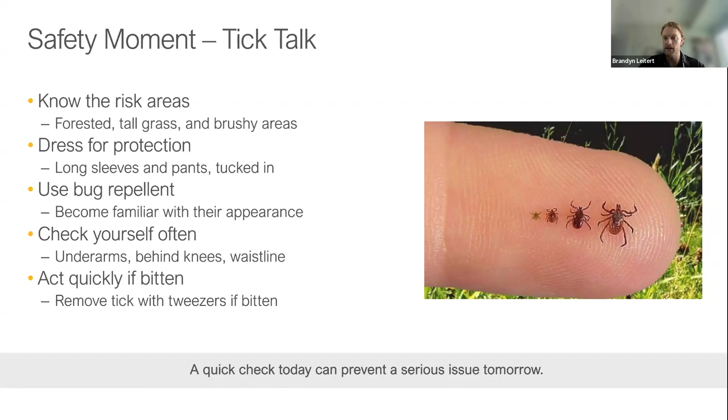For me, the first time I noticed a tick on me was last year, and that led me down the rabbit hole of learning all the different types and the different tick-borne illnesses they carry. The Lone Star tick with the red meat allergy definitely scared me a little bit, but I learned a lot through that, and now I'm able to identify them. So check yourself often, especially after you've been outside, and act quickly if you've been bitten. If you have been bitten, removing it with tweezers or pinching it with your fingernails is important. But usually if you catch it within 12 hours, the risk is quite low—it's once the tick has been on you longer that the risk increases. So just a reminder to everyone to take a few seconds to do a quick check after you've been outside.

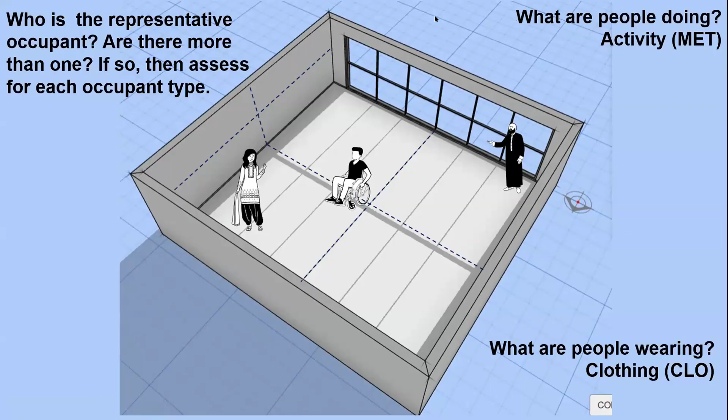So that's great, we'll get you to put it into slideshow mode if you wouldn't mind. Yeah, you bet, let's see. See if I can do this. All right, good to go? There you have it, thank you. All right, so the next slide here, really what we're going to do is, I'm just going to minimize this screen here so I can look at some content. Kimberly, do you know how I can get, maybe there we go. Is that, whoops, just hang on a second. What I'm trying to do is get the screen on the right to disappear, I don't even know if that's possible, is it? We don't see a screen on the right, we just see the blue slide with the home, and then we see your picture up top. So well, I'll tell you what, we'll try to, I'm not sure why that is, but let's just take it and see where we go.

Anyways, one of the very first things we need to talk about today. So as Gord gave us a quick summary, today what we're going to do is talk about how you see spaces and people through the lens of the thermal comfort assessor. And what we want to make sure is that first and foremost, we recognize that there are different people occupying spaces. Not everybody is the same. And as a result of that, we don't want to make assumptions that everybody is the same. So who are we actually designing for? And that is really important, particularly when you get into multiple families living at home or multi-story, multi-family buildings.

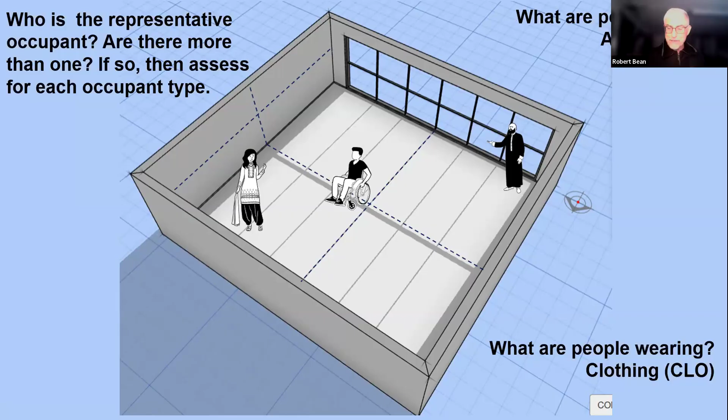So let's start asking questions first. Who are we designing for? And as we learned in part one, we're not designing for the space, and we're not designing for the room. We're not designing for the mechanical systems. We're in fact designing for people. And so we need to start asking some really good questions like, well, okay, so who are we designing for? And what are they going to be doing? And what are they going to be wearing? And tragically, we heard we should have been designing for the person with the gun, the person who was so upset about the thermostat setting. We should have understood, ooh, they've got a gun, we better design for them.

Yes, it was funny. So for those who were in the first presentation, yeah, we brought up that. But then Gord, afterwards, I was thinking, we were talking about perspective, and we showed slides about thermal comfort standards for cattle and poultry and rodents and pigs. And I thought, well, what happens if cows had guns? Yeah, what would that barnyard look like?

So anyways, and then when we start to talk about the metrics, and we kind of introduced them in the first part, when we talk about air temperature, it's really important to understand that what we're talking about is not what the thermostat is reading, but in fact, what is the air temperature around the person. And we make this statement that where the person goes, so goes their sense of comfort. They carry it with them, and it's not represented by anything other than their own bodies and their own minds.

And then we talked about mean radiant, and we're going to talk about that quite a bit in the next hour and fifteen minutes or so. This term represents all of the surface temperatures around us. And why it's incredibly important is that roughly 60% of the sensible heat transfer that people have with their environment is via radiation. It's not convection, it's not conduction, it's not evaporation, it's in fact radiation.

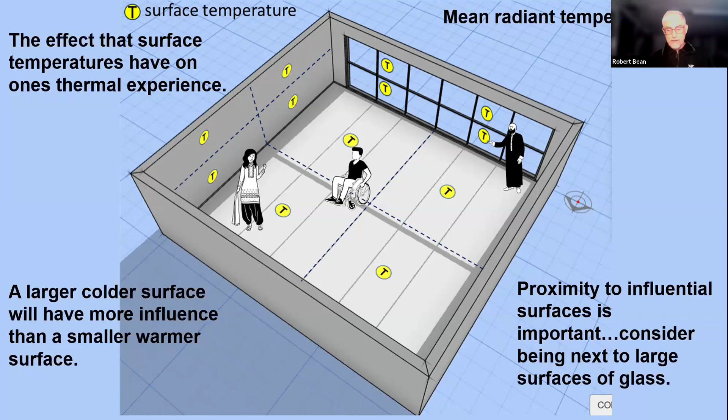Like when you think about standing next to a large pane of glass at minus 40 degrees, it's not pleasant. But if you go into the interior of the space, your perspective changes, what you sense and what you perceive changes as well. So let's keep that in mind.

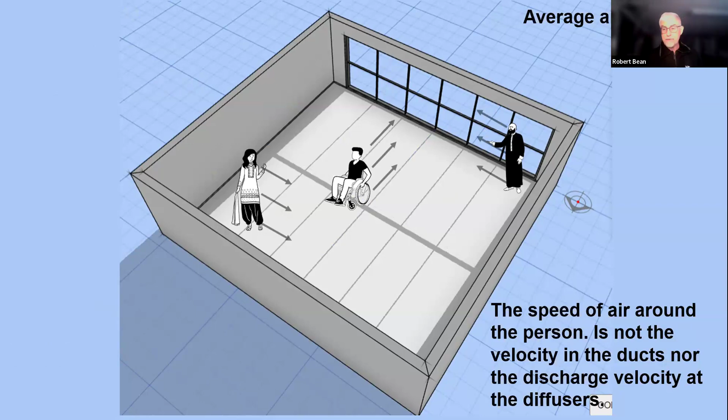And then the next thing we want to talk about is air velocity. What is the air velocity around the person? Again, this isn't what the velocity is coming out of the duct. So when you're doing your load calculations, if you're doing air-based systems and you're looking at the diffusers you're using or registers, and there's these terms throw, drop, and spread - we're not talking about any of that. We're actually talking about what is the air velocity around the person. And that'll come really important here in the next few slides.

We also want to talk about relative humidity. They say it's relative, right? Because it's related to the dry bulb temperature. Well, what do we know about dry bulb temperatures in buildings? We know it's not homogeneous. We start to approach the exterior of the building, and particularly here in extreme climates, that temperature is going to drop, and that's going to change the relative humidity.

So RH is important, but as you're going to learn here throughout the next while, is that humidity, although we recognize it as having a role, in particular in hot, humid climates, there are ways that we can compensate for elevated humidity. In fact, in the standards, we actually don't have limits. There are limits for building science purposes, there's limits for indoor air quality purposes, but when it comes to thermal comfort, we can actually drive humidities up and down, even though it might have consequences elsewhere.

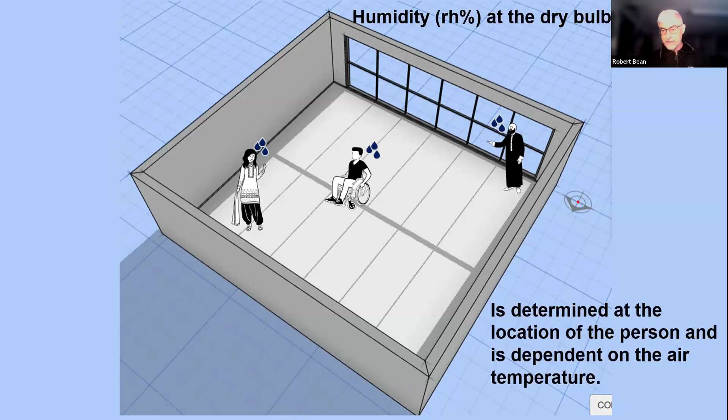Then we also look at what happens to people when they're in a low MET activity and wearing low clothing. There's other factors that come into play. We want to know what are the temperature profiles on either side of the person - we call that radiant asymmetry. We want to know what the temperature stratification is - that is the difference of temperature between the dry bulb temperature, between their ankles and their head.

We want to know what the drafts could be in that space. Ankle drafts in particular are really annoying, especially in cold climates where you've got this change in density as the air hits that glass, changes the profile characteristics of it, starts to come down the glass, and now you've got this draft. So we want to know about these things because they will also play an influence on people's perception. And then also elevated air speeds.

Elevated air speeds actually work really well in hot, humid climates. We don't want to be doing this during the wintertime, but there's lots of times where we can actually use mechanically induced elevated air speeds as a way to provide the sensation of cooling. Not that we're actually cooling the space, because we're not actually changing the air temperature, but we are elevating the airspeed, which improves the cooling off of the occupant.

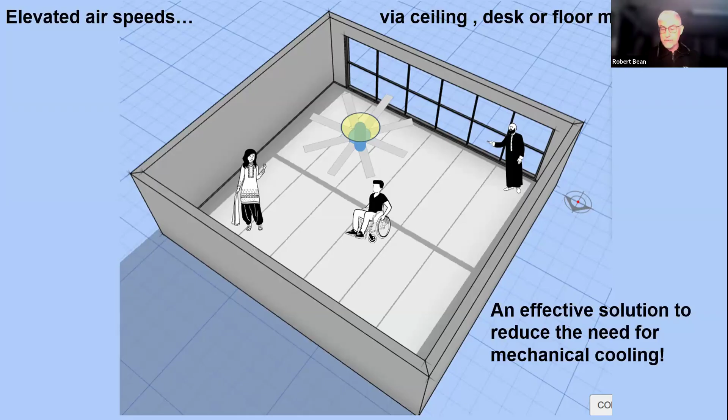And so there was a big push within our community at ASHRAE, SSPC 55, our committee that deals with this stuff, to rather than use more mechanical refrigeration, to look at using elevated air speeds as an alternative way of providing the sensation, the perception of cooling. So one of the conclusions we have here going into the next part of this presentation is that thermostats do not sense what people sense.

They sense themselves, but they're not located where people are in the space, and they don't recognize all of the metrics. Even if you say they do recognize air temperature, yes, that's true at the place where they're located. They don't represent the air temperature where the person is located. So we really want to be careful of that.

When we talk about thermal comfort, we oftentimes hear people say it's a gender issue, males versus females, and we've seen that all over the world. Part of that has to do with research that was flawed. The big publication houses, the Wall Street Journal, the New York Times, they all pick up this stuff and distribute it without digging into the source. When you dig into the source, you find that for the most part, genders have very similar physiological systems in terms of the sensing and perception of thermal comfort.

There are some differences, but it's more of an academic interest. What really drives discomfort between the genders has a lot to do with clothing and restrictions on the ability to adapt. But at the very core of it all sits architecture, enclosure, interior systems.

When these passive systems have flaws in them, and we try to compensate with mechanical systems, this is where one of the big problems occurs. Often we're trying to solve a problem we don't quite understand, using HVAC systems that may not be matched to the problem. So when we have a radiant problem, we solve it with a radiant solution; when we have a convective problem, we solve it with a convective solution. Don't mix those two up, which we have done for many generations, and that has led to a lot of problems inside spaces.

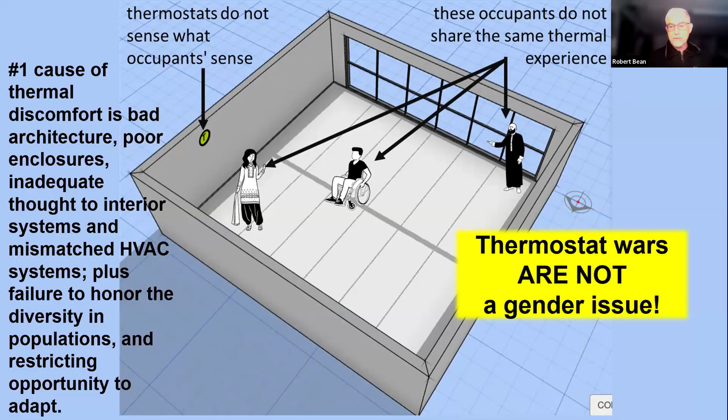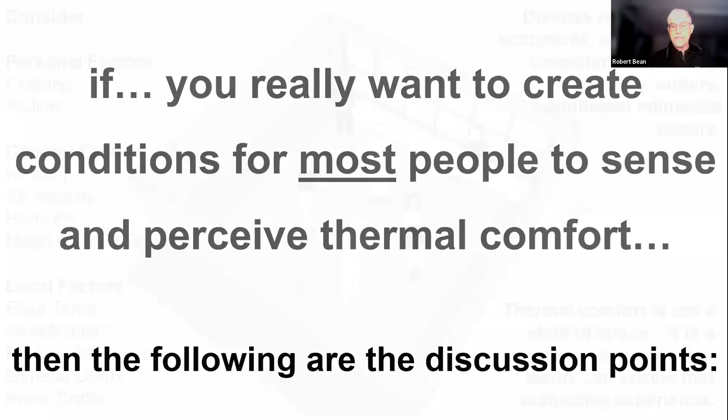So that's really important in this next part of this presentation. If we really want to create these conditions—and Gord, thank you for bringing up the importance of the wording we use—then we can create conditions. Let's talk about the conditions that are the discussions we need to have with our clients.

On the left-hand side are the basic ingredients of the thermal comfort cake. I'd suggest that if you're using air temperature as a proxy for thermal comfort, that's like calling baking soda a cake—you're missing everything else in the process. So we use all of the ingredients to evaluate it, and we need to sit down with our clients through those lenses and ask, okay, who are we designing for?

What are the special needs that might exist? We need to understand that thermal comfort is not an actual condition of the space, but in fact what's actually going on in the mind. We showed slides earlier about positron emission tomography—you can actually see the brain lighting up as you change the environment around it. So let's make sure we understand that. Everybody's brain is not the same, so it's subjective, as Gord pointed out—everybody is different. Not everybody's going to sense the space in the same way.

So we're sitting down with the client, looking at maybe the draft form of a set of drawings, and we want to talk about how seasonal changes affect the indoor spaces, how the sun moves across the building, how the building is oriented on the property, and what the architecture, form, and geometry are. All of these things are important because they start to affect mean radiant temperature, radiant asymmetry, and stratification. All of these things come into play.

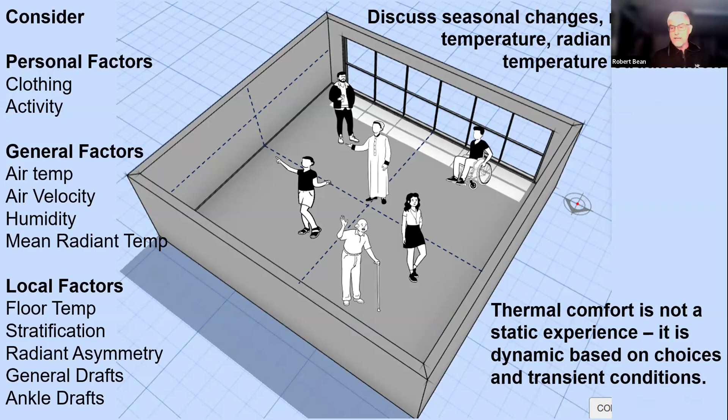So then, as we're dealing with these design elements, looking at glass, we're going to talk quite a bit about the importance of the fenestration systems, the window-to-wall ratios, the performance of the glass, and the orientation of the building with glass relative to the sun.

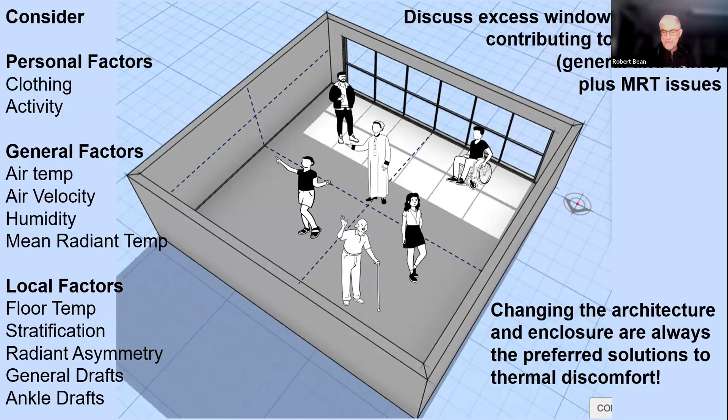All of these things come into play because ultimately they will affect the amount of energy that comes into the building and how that energy moves through the space. One of the things, and this always happens, Gordon, maybe you've experienced this in your own presentations, is that a lot of people, when they do load calculations, they don't account for the inside surface temperature of glass at heating or cooling conditions and the extremes that they can get.

Even high performance glass can have these extreme temperatures. So if you think about a really large window to wall ratio, it might be 100% or 80% window to wall ratio. What we want you to start to look at is surface temperatures that could easily hit 100 degrees Fahrenheit or 55 degrees Fahrenheit. So here you are, your perception of thermal comfort is to maintain a 20-degree air temperature, but in fact you could have surfaces around you that are way off base, and those will drive the expectation.

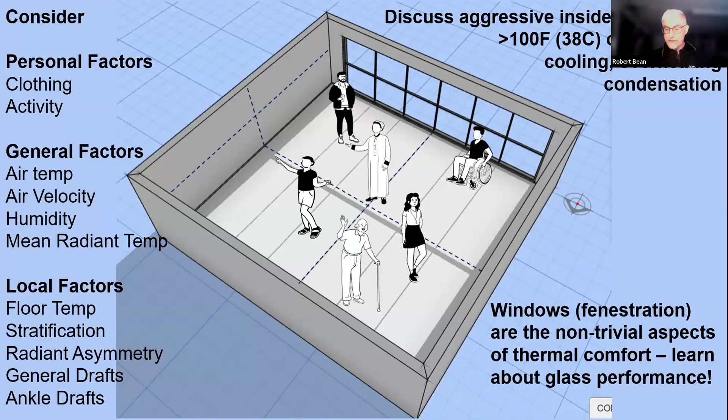So that's why we say air temperature isn't a proxy for thermal comfort. It requires all of these other metrics. So windows, fenestration performance is really, really important.

When we talk about window to wall ratios and what the client wants to do, and what the architect wants to do in serving that client, if we can't get them to back down or be a little bit more conservative with their choice in glass, then we start talking about solar control. And I don't mean on the inside of the building, because that's the worst place for it — do it on the outside. Develop shading strategies that prevent that shortwave radiation from landing on the building in the first place, or coming through the glass in the second place.

And I just came back from Brisbane. We were there for a couple of months, and I can't think of any other city in the world I've been to where they have mastered the art of exterior shading in all building forms, all building shapes. They really understand that sun provides wonderful things for humanity, but ultimately, as it's starting to prove out with climate change, it is becoming a real problem for us inside spaces.

So that's really important. And then when you start to talk about the glass — learn about it, Gord. I think you probably agree with this: if there's one thing people could understand in the world of architecture, building science, mechanical design, it's to learn about glass, learn about windows, learn about the coatings you can put on, learn about when you need to go from a double pane to a triple pane. All of these things are incredibly important. And I would say, if I was the master of the universe in education programs, that would be one of the key courses I'd have people take.

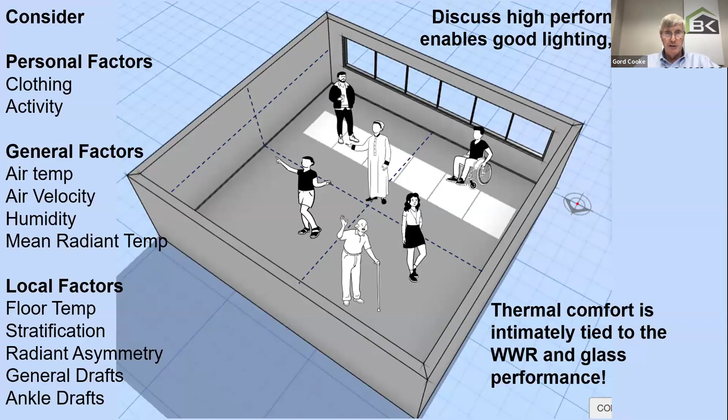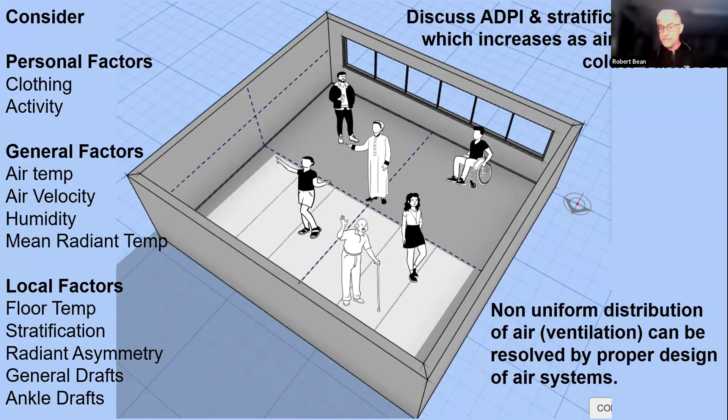And then we want to talk about this concept — not many people on the residential side know about Air Distribution Performance Index, or ADPI, but we can use these principles to make sure we have really good mixed temperatures within the space if we're using air-based systems. We also want to draw attention to the fact that as we go from the inside to the outside, our relative humidity will change as it approaches colder surfaces. So we want to try to avoid non-uniform areas, and we can do that by using good design practice. And Gord, I think you've been teaching that for a long, long time.

So that's important. We want to talk about, particularly in hot, humid climates, because we do have some people from hot, humid climates — and by the way, shout out again to those who are from around the world.

Again, we have people from India and Egypt and other parts. Thank you for that. And Ajax, India, Egypt, and Ajax. Thank you, yeah, that's awesome. I'm kidding a little bit. That was nice of Pradeep to say where he's from.

When we're talking about these hot, humid climates, the ability for the body to release energy via the latent process requires that we create a differential between the vapor pressure in the room compared to what's on your skin. If the vapor pressure in the room is the same as your skin, you're not going anywhere with that. So why we dehumidify a space is to create that differential, so that if you get into a place where it's overheated and humidity is playing a role, we actually enable the body to do that discharge by lowering the vapor pressure in the room, which is what dehumidification does. But we're going to talk about that later, about when that becomes important and when it isn't.

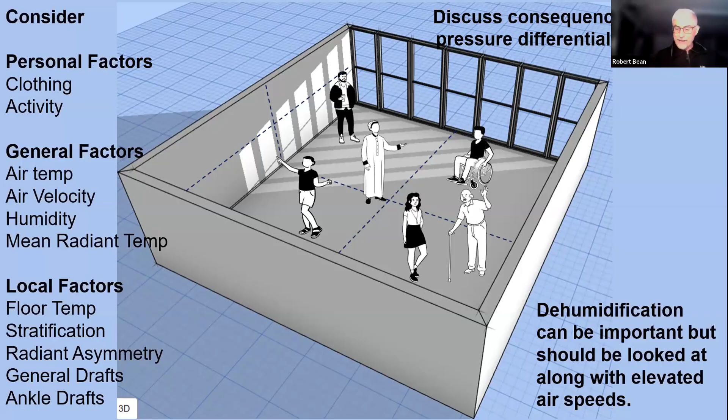We've already mentioned using elevated air speeds in lieu of mechanical cooling. So when you're sitting down with your clients, if they're not willing to budge on window-to-wall ratios, or they're not wanting to put on exterior insulation to solve these thermal problems, rather than going to mechanical cooling as your default, ask them: would you consider using ceiling fans, for example? Some people are okay with ceiling fans, others find it unattractive. So have that dialogue so you're not making assumptions about what they like and don't like.

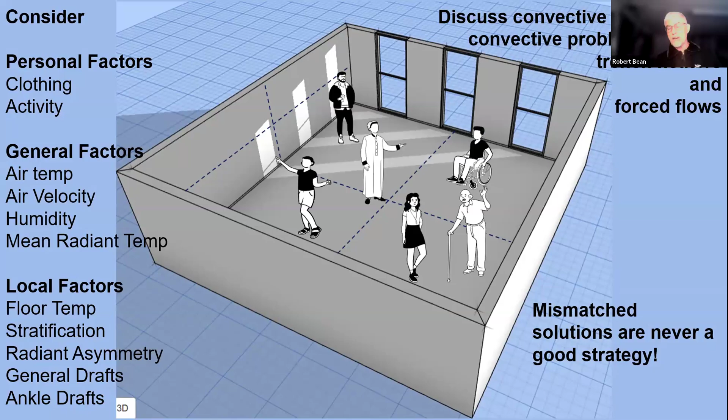And then understanding in terms of temperatures: radiant solutions for radiant problems, convective solutions for convective problems. Just make sure we're not trying to solve a problem with the wrong solution, which we have. Unfortunately we're all guilty of doing that, but just keep that in the back of your mind, okay?

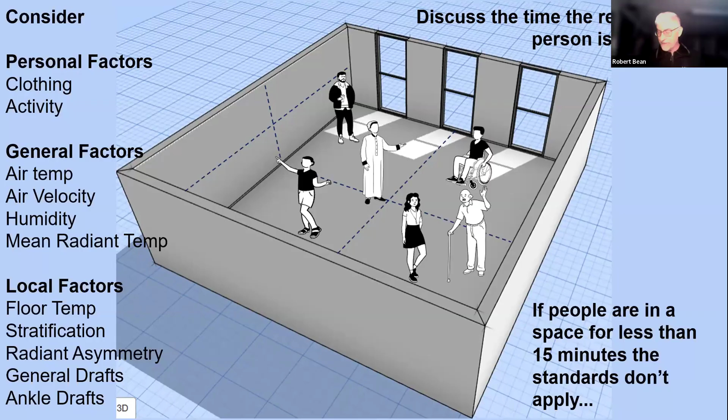One of the things that's really important when we talk about thermal comfort is that there are going to be spaces in homes or buildings where people just don't spend any time, and we don't really need to concern ourselves with that. The standard says if someone's in the space for more than 15 minutes, then we need to pay attention to it. But if they're not in the space for more than 15 minutes, not an issue. So we don't worry about boiler rooms, storage rooms, closets. These aren't the things we're concerned about. We're concerned about where people are actually going to be living and doing the things they do during the day or night.

So then we also want to talk about adaptive comfort, natural ventilation, these types of things. I'm all for using adaptive methods whenever we can, but we can't do it without understanding that there are risks. When you think about the drive to use natural ventilation, we're going to open up the inside to the outside. As soon as we do that, we're inviting the outside in. Well, let's define the outside — it can have bad air quality, there could be noise, there could be security issues, there could be protests, all these things that can happen on the outside. As soon as we open up to naturally ventilate our spaces or adapt for comfort, we're inviting the outside in. And that's great if it's got great air outside, there's no noise, no security issues, moisture's not a problem.

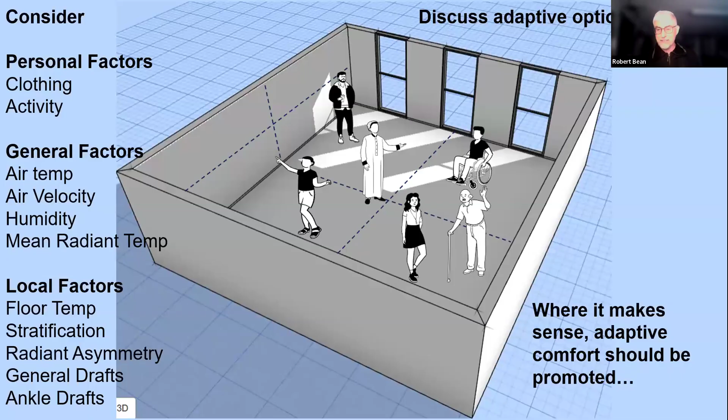What I would challenge you today — and we've been working with other organizations around the world — is that when you push adaptive processes, natural ventilation, natural heating and cooling, recognize that every building is on a continuum, as is the community around it. So you might think that building today is a good candidate for adaptive measures, natural ventilation, but also try to understand that over the next 50 or 100 years, anything could come around that building. It could be a meat packing plant, a set of train tracks, a bus route put in next to you. So just keep that in mind when you're thinking about using adaptive methods and measures in your analysis.

So the hierarchy of design always starts with architecture — the shape of the building, the form, how it's situated on the property itself. The property is important.

What's next to the building, the colors that are on the building all come into play. What we call the thermal optical properties, its absorptivity, its emissivity, all of these things are important.

Then we look at the enclosure. Now we're talking about the performance of the glass. We're talking about infiltration, thermal bridging, all of these terms that we use to describe the performance of the enclosure, that comes into play.

And then we talk about interior systems. When I talk about interior systems, I want to make sure that we're not confusing interior design with interior decoration. I made that mistake once while riding from the airport with the senior president of the American Society of Interior Designers. I said, well, what do decorators do? She just about kicked me out of the taxi.

So interior designers are people who very much understand colors, absorptivity, emissivity, fire escape plans, all of these things that are important. So interior systems, we talk about placement of furniture, things that might disrupt flow patterns, might affect the thermal comfort of people. They're a big part of it.

And then, and only then, do we talk about mechanical systems. So those first three, architecture, enclosure, interior systems, those are all passive solutions. And when they're done right, then it's easy. The mechanical stuff actually gets pretty easy.

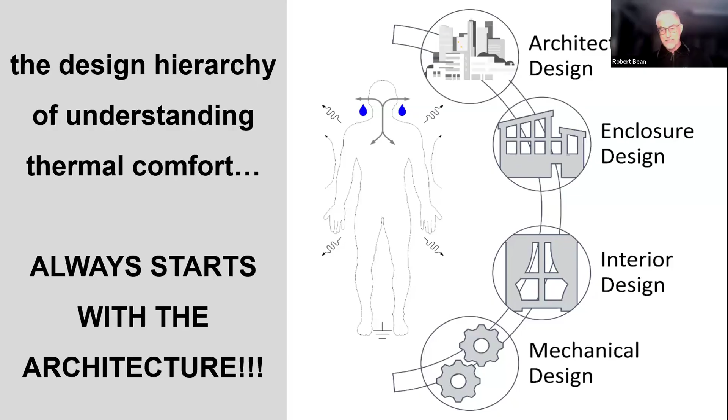It's when they have flaws that now we have to do our song and dance on the HVAC side to compensate for their shortcomings. So I always believe that when we look at HVAC, it really is the cleanup crew. If anybody's a fan of John Wick, you all know about the cleanup crew, and that's what HVAC does.

It basically says, okay, well, we've looked at all of these systems, and because we've got large window-to-wall ratios and the glass isn't very good, and the client didn't want to put exterior insulation, and they're not going to do anything about infiltration, this is going to be a really crappy building, and so we're going to have to step up our game, and we're going to have to put in a little bit more different systems than we would do if the building actually had a lot of passive solutions, right?

So it is not the Holy Grail. It is, in fact, the cleanup crew, and I think it's important that we understand our role in this whole process. The tools, and we're going to start talking about tools now.

So I hope we understand that when we're sitting down with our clients, that we have these dialogues about the filtering systems, the lenses, what's in the standard, the clothing, met rate, air temperature, radiant temperature, humidity, air velocity, stratification, all of these terms, those are our lenses, those are our factors.

And we can use that, and we can sit down with our clients, and now we can have real honest dialogues about the design intent for these buildings. And then what we can do, and this is one of the exciting things that we did at Spring Camp, we're going to talk about this later on, is we can sit down with some of the design tools.

So if you have a phone handy or a second computer, if you want to search CBE thermal comfort tool, by all means do that, because what we're going to do now is we're going to spend the next while going through this tool. So I'll give you guys a second to locate that if you want.

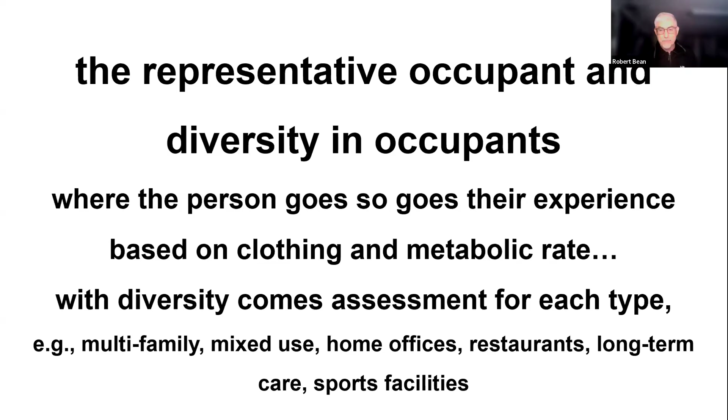And as we go through the tool, feel free to play around with it. And all you need to do is just listen to my narrative, because we're going to describe the tool and how powerful it is. So the first thing going back is that recognize who we're designing it for. That's really important, and understand that there's diversity in spaces with people, and so we should also recognize that.

So this is what the screen looks like. When you go online, you're going to come across the screen, and if you're on a phone, you're going to have a little bit different screen than if you're on a computer. When you're on the PC or the Mac, whatever, you're going to see the full enchilada right there on your screen. If it's a phone, you're going to have to scroll through to get the different screens.

And this is really sort of where we do the inputs and the outputs, and it tells us whether our combination of these factors are going to be in compliant with ASHRAE 55 or not. There's the phone version for you. For those of you that are following along, you can just scroll and you'll be able to see all the different screens.

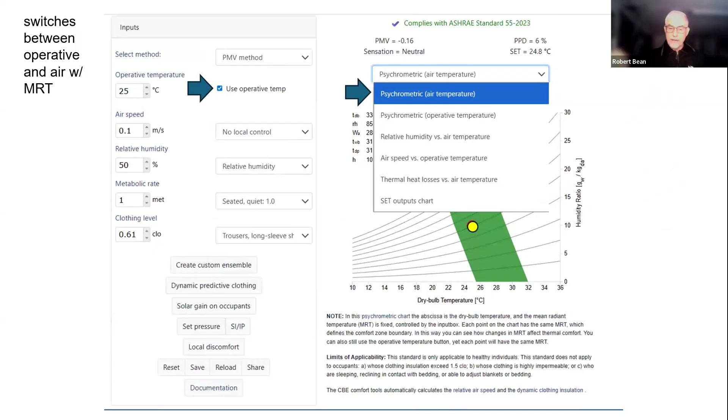So there's a bunch of switches we can use. The first thing we want to do when we get onto the tool is switch it from being a psychrometric chart, just air temperature only, to just air temp. Then there's another switch which takes us over on the left-hand side, the operative temperature switch. We want to click that, because ultimately what we want the screen to look like is this, where we can put in a value for air temperature and a value for mean radiant.

For those of our audience today, Gord, who are in the US, they're probably looking at this going, it's in Celsius, what am I going to do? They're all panicking, they don't understand the units. It's okay, because you can switch back and forth between IP and SI. The message you should see here is don't worry so much about the units, because what we want you to understand is the relationship when you change the values. That's the power here, and to see whether you're in compliance or not.

So now we're sitting there with a tool that says, okay, what is the air temperature and what is the mean radiant? These are the inputs that we have. For the most part, all of these are pretty easy to wrap your head around. Air temperature, as we mentioned, isn't what's at the thermostat, it's actually around the person. So now we have to ask, how do we determine that?

If it's fairly good construction - for those of us in IP units, say 20 BTUs per hour per square foot, something like that is okay construction, not great, doesn't really suck. We're not getting into the 30s or 40s, and we're not down to passive house, we're down to 5 or 8 BTU hours. For the most part, in good construction, you can assume the air temperature around the person is going to be very similar to what you set on the thermostat. But if it's a crappy building, you're going to have to make some judgment calls or use more advanced software. We'll talk about that later on.

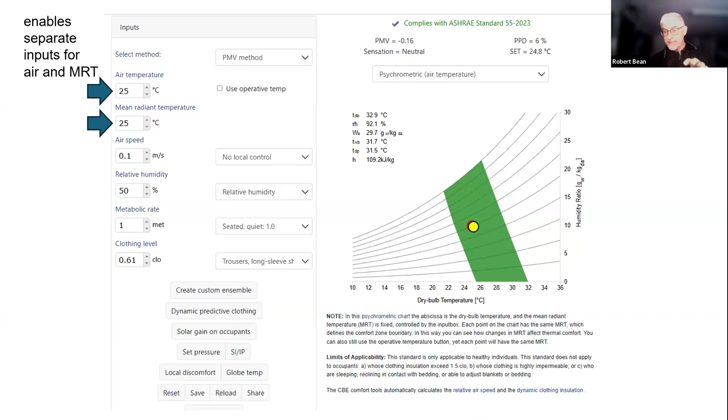The MET rate and the clothing values are inputs, and those are all selected items off a table, which we're going to come to. And now, anyways, when you get all of these right, when you get the combination right, you're going to be in compliance with the standards.

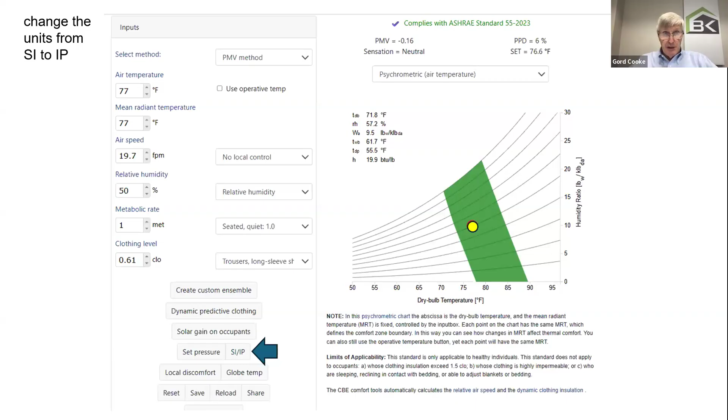So, as I mentioned, Robert, it is true - the mean radiant temperature, as you mentioned, is a calculation you do separately, and our folks did it, and we found it daunting if you're going to try to do every room in the house. But when you helped us quickly identify what we'll call rogue zones, that simplified it, though it did take some calculations and understanding of building science. It's the place where the work of an energy advisor makes a lot of sense, because they're doing a lot of the same calculations anyway and inputs. So it's a good role for an energy advisor to do the mean radiant temperature calculations.

You bring up that term rogue zone, which is something I coined - I don't even know when. I just remember doing design work, looking at drawings and going, okay, that's not looking like the other zones, and that's going to be a problem. So it's those zones that you know intuitively. If you've done design work for any length of time, you can look at a set of drawings, look at how that building's going to be oriented on the property, and go, uh-oh, that's going to bite us in the butt if we don't pay attention to what's going on in that space. So rogue zones are important.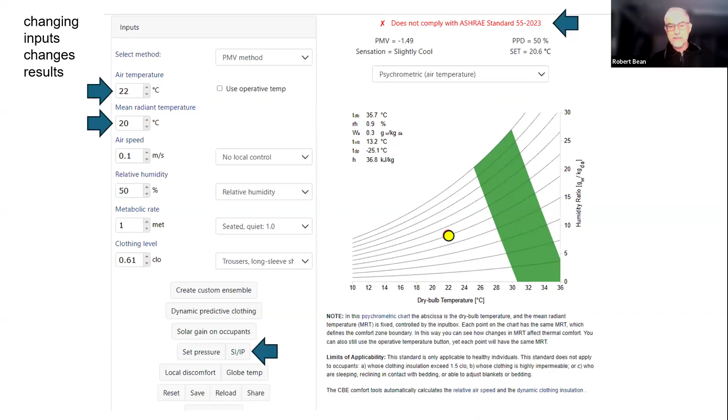So you can switch back and forth - if you want to work in IP units or SI, you can just see that the results are the same. So let's go a little bit further into the tool and talk about some of the menu items.

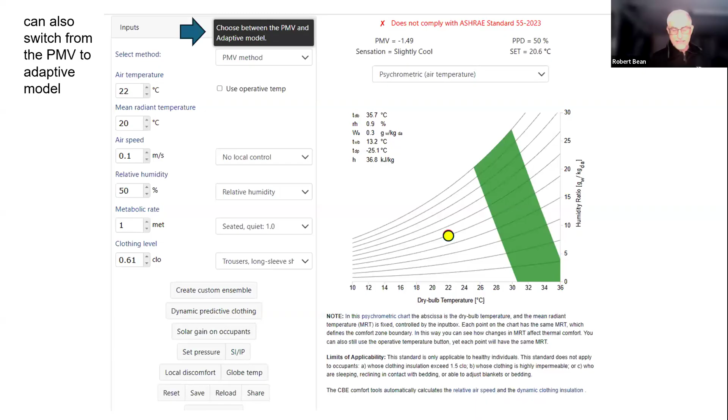PMV - we talked about that earlier in part one, predicted mean vote. Get everything right so we can do some reasonable projections about whether people will be uncomfortable or not. So that's important, and we can switch between that or the adaptive model.

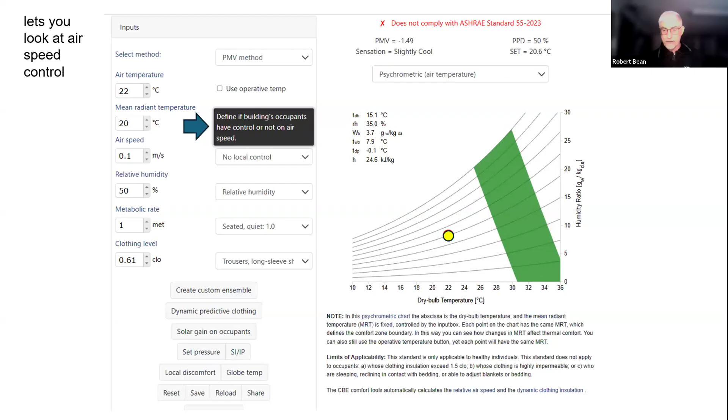We can define whether people have control over their airspeed or not, and this is really important. We know that when people are restricted - they don't have access to change their environment, can't add a fan, can't open the windows, can't change their clothing because of clothing policy - that actually has a psychological effect. It makes it even more difficult for them to enjoy the space.

We can change how we look at humidity, whether you want to do wet bulb, dew point, however you want to look at it - you can change that on the screen. And then the two most important factors, or two more key points, are what people are doing, because that has a huge effect, and also what they're wearing - metabolic rate and clothing.

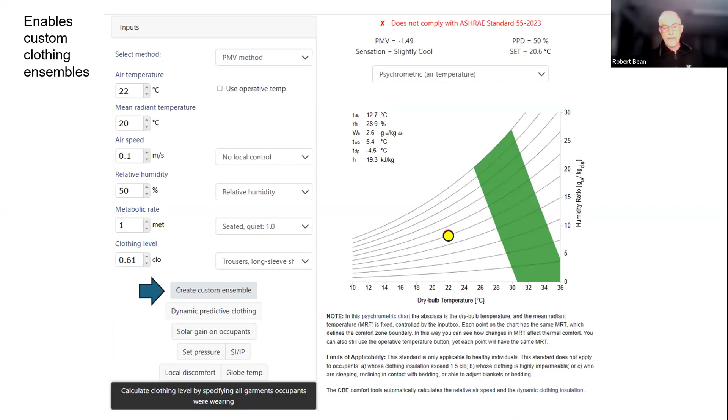You can do a number of things here - you can actually create your own ensemble. So if it's not in the menu item, you can build up your own, which is very useful if you're from a different part of the world and maybe you have different clothing cultures. You can say, okay, here's the clothing value of what we wear in our world, and for those in other parts of the world, say, well, we wear this. So we can do that.

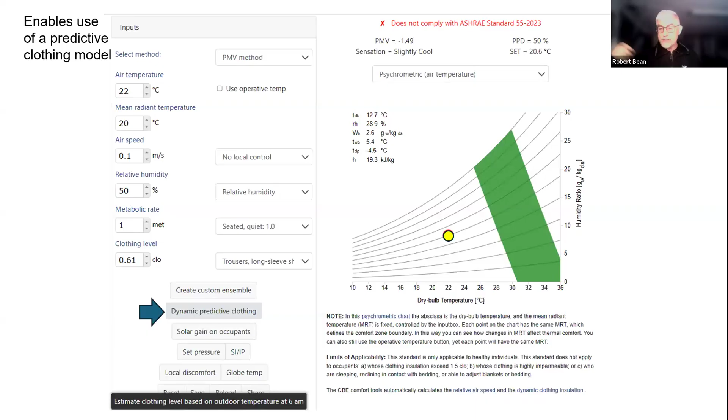We can also use what's called the dynamic predictive model. We know from research that's been done that when people get up in the morning and ask Alexa or Siri what's the weather forecast for today, they'll adjust their clothing for the day if they know what's going to happen. So you can use that tool as well.

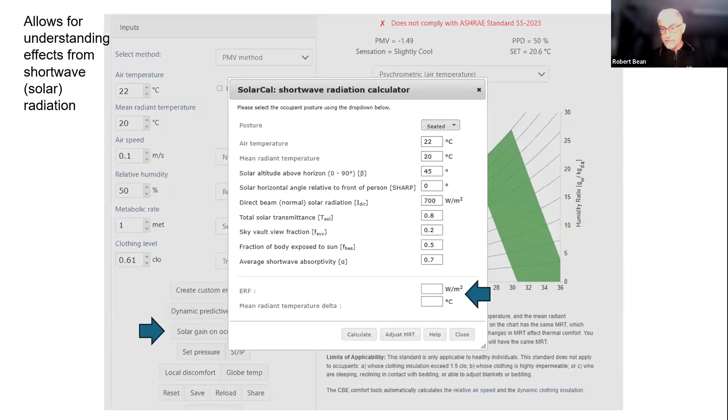One of the additions that was added to the program many years ago is this solar calculator. What the solar calculator does is allow us to take a room, put windows in it, and say, okay, here's the performance of the window, here's the exposure to sunlight, and here's where the person is in that beam, if you will. So what are the consequences? You can do an adjustment to the MRT based on shortwave radiation, which is an incredibly powerful tool, as we found in some of the exercises we were working on. So that's the meat and potatoes of the tool.

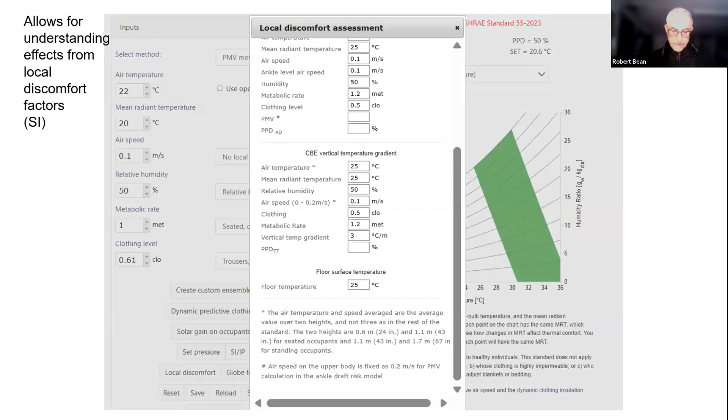And then we look at this predicted mean vote, we look at local discomfort factors, and the tool has a whole set of menus that you can punch in numbers, looking at things like radiant asymmetry. We've already talked about these: drafts, ankle drafts, vertical temperature gradients, these types of things, all the way through to floor surface temperature. So these are either inputs that you can do through calculation or through judgment call, or when you get into challenging architecture, you can actually model them with other types of tools.

I would just suggest here that when you're using these tools, for the most part, when you get basic geometry, basic architecture, you're not going to have a problem. It's when you get into the origami, flamboyant architecture that you really need to recruit somebody that knows what they're doing with other more advanced software. But for basic stuff, you're going to be fine.

So one of the local factors, several of the local factors that we're showing here has this term radiant asymmetry. That's when you got temperatures on either side of you that are extremes.

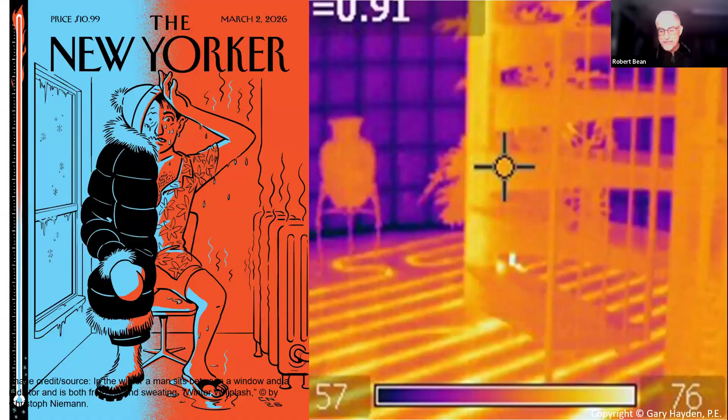We have floor temperatures that we need to concern ourselves with. We have stratification, the difference between the ankles and the head. And then we also have drafts.

I just want you to observe this - it's like Poltergeist was in my hotel room. You can see the pillows fluttering. And so as soon as I saw that, I said, Gord would like to see that picture. So I took a video of it.

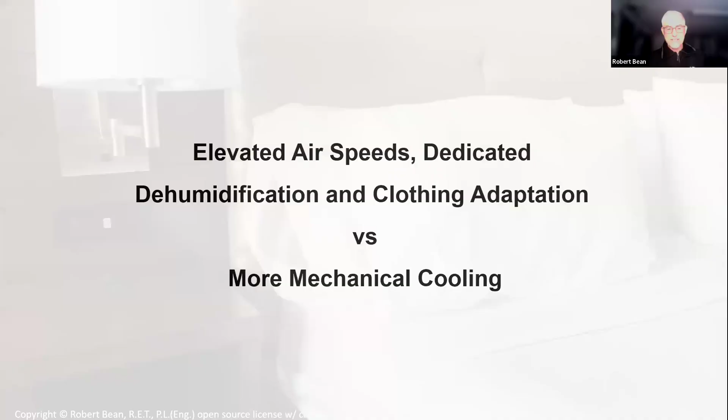Drafts like that, if the room is hot and the air is cool, they do provide some sensation, but you would never want to have that during the wintertime. Drafts aren't necessarily a good thing. So we pay attention to these issues.

So going back to the tool, let's just set up some parameters. We're going to go with the building code requirement, 72 degrees. We've got a mean radiant at 78, which means we've got a building with probably some glass, probably some thermal bridging going on, probably exposed to a south-southwest exposure for those of us here in Canada. You can see what the airspeed is, the relative humidity, met rate, clothing - we're all good. And in this case, with this combination, we're going to be compliant with the standard.

But what happens if we start to change the parameters? So here we've gone from 72 to 74, but look at the mean radiant temperature - we've really jumped it up. So what does that tell us? It tells us that we probably got a really aggressive window to wall ratio. The glass probably not the best performance. Airspeed, relative humidity, and the clothing.

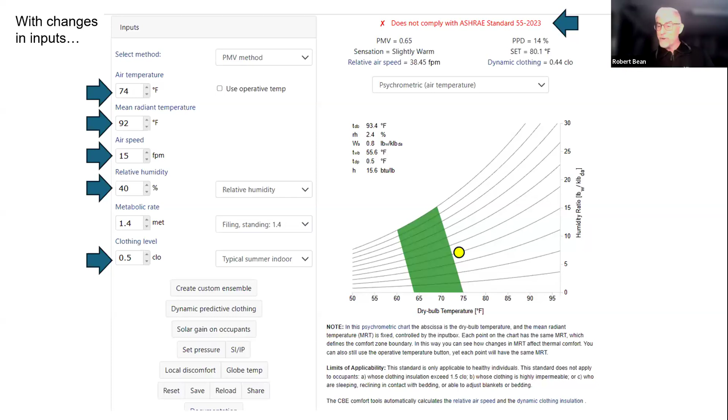So we've changed these parameters, and now that program is going to tell us, hey, you may want to pay attention to this stuff because most people wouldn't find this space comfortable. And one of the things that I want you to appreciate as we're going through this is that we're actually fixing the problems before the building gets built. And that is so important. We don't want to come in after the fact to try and solve comfort problems when we can do it ahead of time. That's the value of this whole exercise that we're doing.

So how do we compensate for a space that's got aggressive radiant temperatures? Well, we can bump up the airspeed. We can put in a ceiling fan, and that can help us compensate for this thermal experience that may not otherwise be comfortable.

So, Robert, can I take you back? I'm just looking at the top there where the bar says complies, doesn't comply. Just explain for a second and remind folks the PMV and the PPD, because the numbers are changing, and I think that's useful to highlight to give you a sense of what that means.

Yeah, so in part one, we talked about the predicted mean vote and the percentage of people dissatisfied. And this was a result of the work that people like Ole Fanger did many, many years ago. They basically, through research work, established that when you have all of the cookies in the jar all done right - everything, all the ingredients done right - that we can predict that most people will experience the space with a positive attitude.

But if we start to get things wrong, they're going to start to complain. And the more things you get wrong, the higher the percentage of people that will be dissatisfied, which is on the right. So this target that we have is 0 plus or minus 0.5. That's what we're shooting for, on the PMV.

That's exactly right. And is it perfect? No, what we want from the value of the PMV is for it to identify the landmines. It's basically like your sergeant taking you through the field as the brand new soldier. This guy's got all kinds of scars and wounds, and he's guiding you through. That's what this tool is: your ability to look at the architecture, enclosure, interior systems, mechanical, and say okay, where are the landmines? That PMV is going to keep you on the safe track. If you can get 0 plus or minus 0.5, there's a good probability you're on the right path. So that's what that's all about.

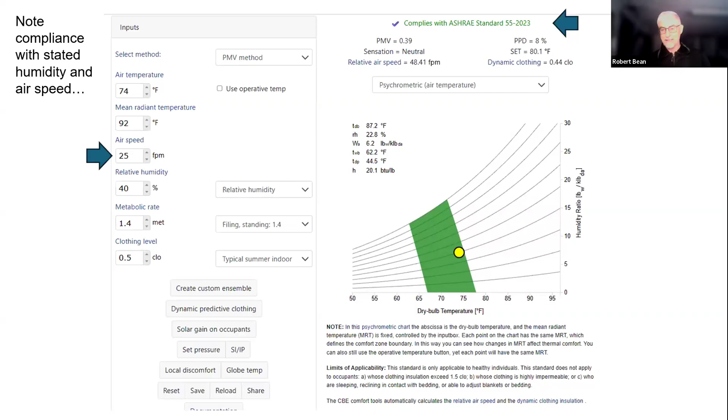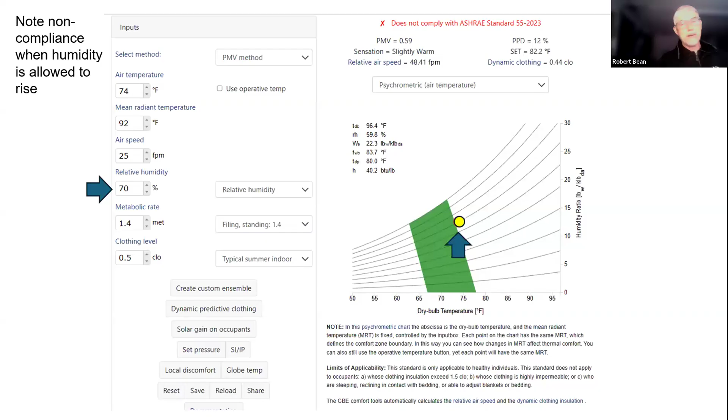Thank you. All right, so let's play around. Let's say maybe we're not going to do humidity control, and there's a high probability it could start to climb up. So now we're starting to get some fairly aggressive humidity. We don't know of any argument that you'd want it that high, that's getting up there. We'd like to see it down lower than that. So let's talk about humidity.

What we know is that when you're in the normal range of indoor conditions, humidity just isn't going to be an issue for us, provided that we're controlling it. But where it becomes a problem is when conditions start to get up into the more aggressive areas, and the body starts to switch from cooling via radiation and convection to using evaporation, that latent process of removing heat through sweating and evaporation. If we don't provide a place in the room for that moisture to go from our bodies, in other words it gets suppressed because the humidity is high, you're going to start to overheat. So what we want to be aware of is that when we get into these aggressive climates, or we have bad architecture that leaks a lot and moisture migrates into the space, or we're over-ventilating our space and not taking care of the moisture, we're going to start to see aggressive conditions. In these cases, we want to pay attention to that in our design process.

So that's on the thermal comfort side, but there's a whole bunch of other reasons why we control humidity. I'm not going to go through the whole list here, but you can see that. Good design practice looks at all of these things. These are the reasons why we control humidity.

I just want to put in a plug here because I was raised on radiant heating and cooling with dedicated outdoor air systems. That was my very first biscuit when I was a little kid, that's what I chewed on. And people get all twisted out of shape: oh, you can't use radiant cooling, it's going to condense. Well, no. If you're a competent designer, you're going to control moisture for these reasons, and because you control moisture for these reasons, condensation isn't the issue that we think it's going to be. But by the way, that applies to air-based systems too. So controlling moisture is important for many, many reasons besides the thermal comfort part of it.

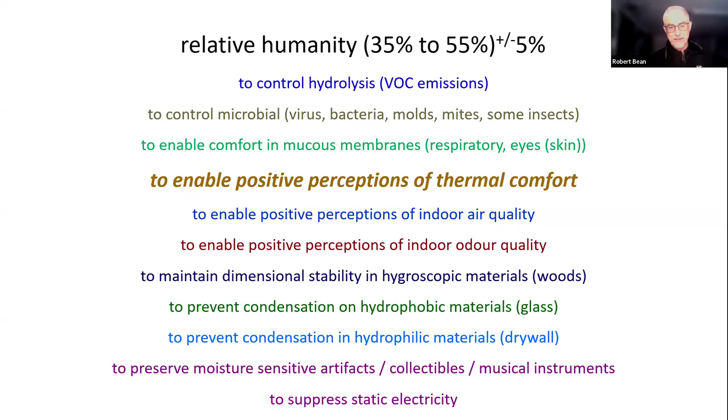All right, was a quick question I'll just answer. Chavez was asking about relative humanity. Oh, I guess maybe he's saying there's a typo there. Relative humidity, I think, is what we were chatting about. I don't know if there was a typo on yours or not, but I guess he's joking at us. Sorry, I can't remember. Yeah, maybe it was humanity. I'll go back and look at it later.

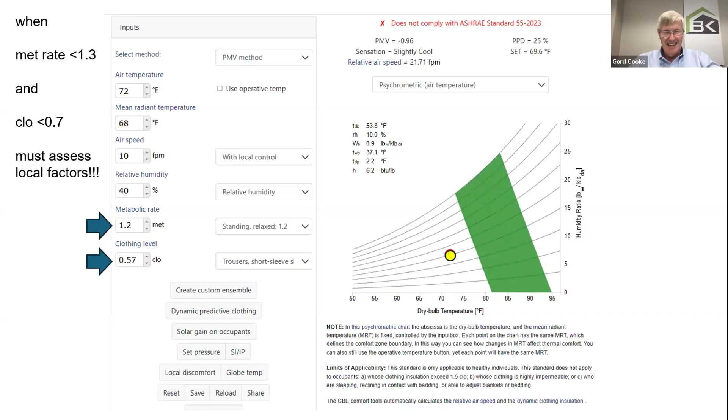Yeah, exactly. All right, there is a red flag that when you're looking at design, you have to, when you're doing an assessment of your representative occupant, you're saying okay, what are they going to be wearing and what are they going to be doing? And if there are times where that person is going to have a low MET rate, so they're reading for example, and they're going to be wearing really light clothing, so summer shorts, t-shirt, maybe sandals or flip-flops, that type of stuff, then you're going to want to do the local assessment. That's really important.

I'd say probably 70% of people that do thermal compliance checks with ASHRAE 55 get the first two personal factors, clothing and MET rate, and they understand the other four general factors, but they always miss the local factors. And it's right in the standard. When people are doing low MET rate, low clothing, you've got to look at those local factors.

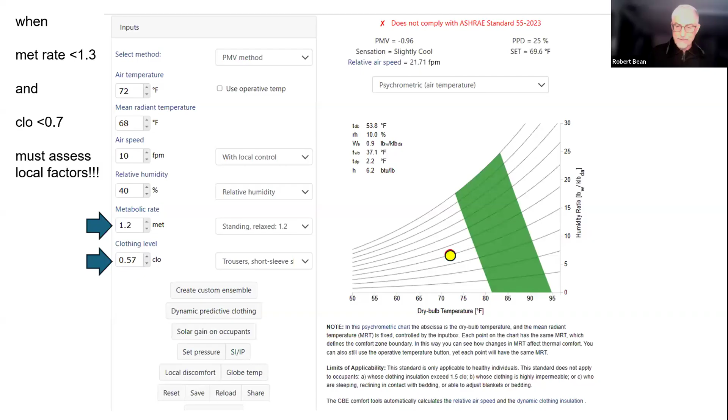So floor temperature, stratification, radiant asymmetry, all of these things are important. So we can put those values in.

And what I'm showing you here, these X values, means that we've exceeded the tolerances. So we know we don't want too high a temperature difference between the walls and across a person, or the ceilings. We know draft can be a problem in the wintertime, not so much in the summertime. Draft can be a good thing in the summertime, especially if it's beer, comes in a glass, frosted, right? Draft, that's the best, right? Ankle draft, temperature gradient, all of these things come into play.

And then this solar calculator - what I want to do is demonstrate the power of this tool. Going back to an example where we've got air temperature, and it's quite common that people will assume the surface temperatures in the room are represented by what's on the thermostat, which is a bad mistake to make. But let's see what happens here.

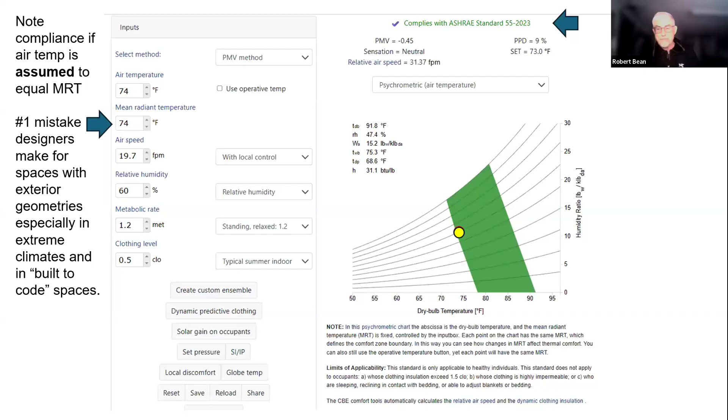Okay, so we've made this mistake that the MRT is the same as the dry-bulb temperature, and I can tell you that rarely ever happens. But here we're going to set it up, and then we're going to say, well, let's just see where we go with this solar calculator.

So we open up the menu and start to populate it, and we can tell, okay, is the person standing or sitting in front of the window? There's the air temperature, there's the mean radiant temperature that we assumed was the same. We can look at the altitude above horizon. All of these terms, by the way, are defined and explained in the tool. So how much of that energy is coming on the glass?

Here's 700 watts per meter squared - what the transmittance of that glass is. This is very similar to the solar heat gain coefficient, but not quite, though there's some clarity on that. For this purpose, let's assume how much of that energy is coming through the glass, how much of the sky vault of the whole solar thing is actually coming through.

And then what percentage of it is actually hitting the body, right? So here we're saying about 50%. And there's guidance in the tool that says, well, is somebody at a desk? Are they sitting in a chair? Are they standing up? All of these are provided.

And then what the shortwave absorptivity is. Most skin, clothing, wall surfaces have fairly high absorptivity - what we call the solar or thermal optical properties of anything really. Our bodies are actually almost perfect absorbers and emitters, which is why we talked about in part one how we're almost the perfect radiant element.

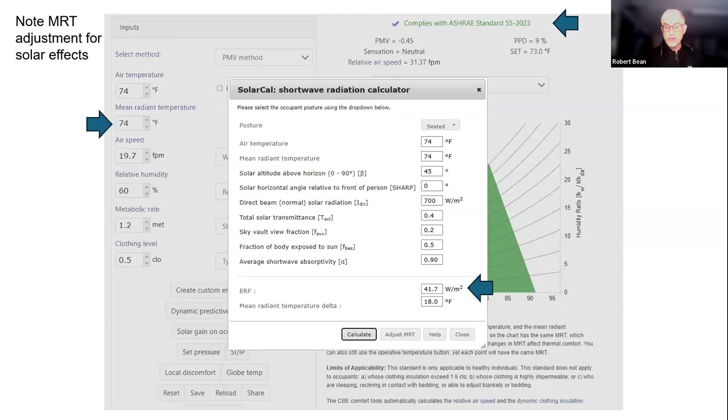Anyways, you can populate this and then do the calculation. What I want you to observe is that we assumed the MRT was 74, and then we say, well, let's take a look at what the consequences are if we put glass in there. So you do an adjustment of that, and you can see now the MRT is not the same as the air temperature anymore - now it's 92 degrees, and now we're no longer compliant.

So before you participated in this seminar - because I know this happens all over the world in all kinds of design offices - making the assumption that surface temperature is the same as air temperature, it's not, and you need to evaluate the impact of shortwave radiation coming through glass. You can see that it can take something you thought was compliant, and now it's not. And if you don't solve that problem now, Gord and I will be here today to witness and testify that it will come up later.

So when do you want to do it? At design stage, or after the people have moved in and now they're on the phone telling you, you know what, because it's uncomfortable in the space, right? You never want that call, right? You always want to be able to solve problems up front.

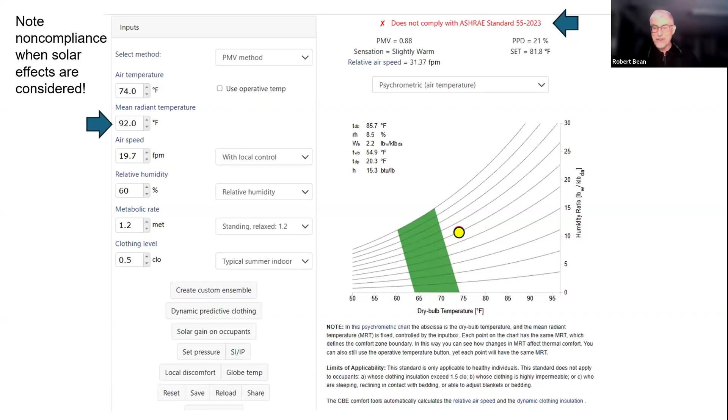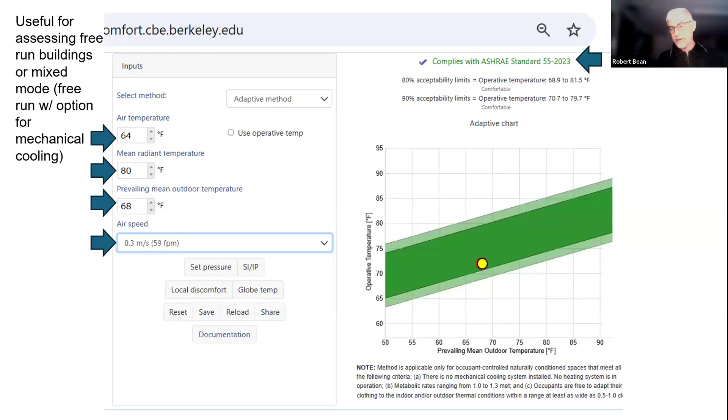So then there's this adaptive method, and we talked about adaptive, and I'm a fan of adaptive processes, but we want to make sure we use it properly. There's a way to take the tool and switch between the PMV method or the adaptive method. Those are two methods we use. You can populate the cells, the menus if you will, and it'll tell you whether you're going to be in compliance with the adaptive methods, change the airspeed, change all of these things. As long as you're in that zone, then you're good to go. We call it hybrid systems or multi-purpose systems.

Now, what I want to point out is that as you familiarize yourself with this tool, there's lots of documentation online, there's YouTube videos that explain how to do all of these things. But I'd recommend that as you explore it and learn about it, reach out to Building Knowledge Canada, because they've got people now trained on it. You're going to come across situations where you'll go, you know what, we're just getting out of our league, let's bring in some people that know a little bit more about it.

One of the cool things about the tool that I really like, particularly from a design point of view, when we were working with clients, is we could create different scenarios and bring them to the architect and the client and point out, well, because you did this, here are the consequences. And if you would consider doing this, here are the consequences. And if you really take everything we have to say to heart, here are the consequences. So we tried to take the client from good, better, best, or worst, all the way through to: if you really fix these problems, you're going to have awesome inside spaces from a thermal point of view. I think it's one of the most powerful parts of the tool myself.

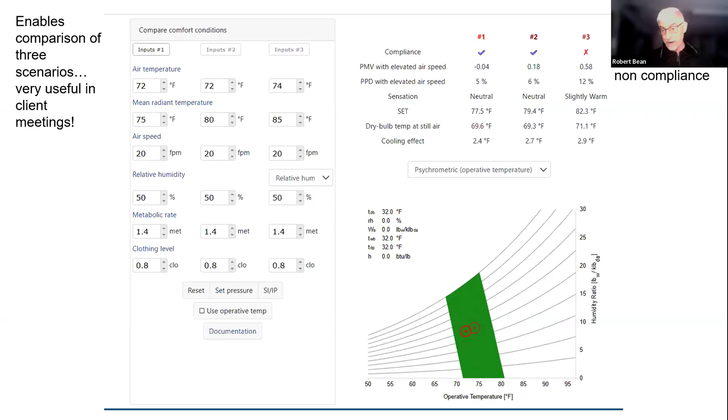We mentioned elevated airspeeds, and I have to tell you, this is a project that we're like 99% finished. Gord, you know what that's like. At some point, I don't even know, at what percentage of a building are you done where you just say, you know what, we're done? Is it 95 or 99?

Anyways, we've taken this old farmhouse. We actually don't know when it was built because it was brought to the site, and over its life it had several repairs. They did all kinds of things—as we ripped it down, we found 5 different forms of insulation, we found bare wires. It was quite an experience.

We've completely rechanged this building, the experience. One of the things we knew from calculations is that maybe 40 hours, 60 hours a year, something like that, we were going to need the ceiling fan. So we put the ceiling fan in there. There's no mechanical cooling in here, although that is under debate right now, whether we'll do that or not.

For the most part, we've taken a really conservative building—there wasn't a lot of thought in the original building to insulation and tightening it up. We actually did use an air barrier in here, and I got to tell you that we reduced the leakage, Gord, by I think it was 67 or 70%. Massive, massive, massive change. Amazing. And that's a great product.

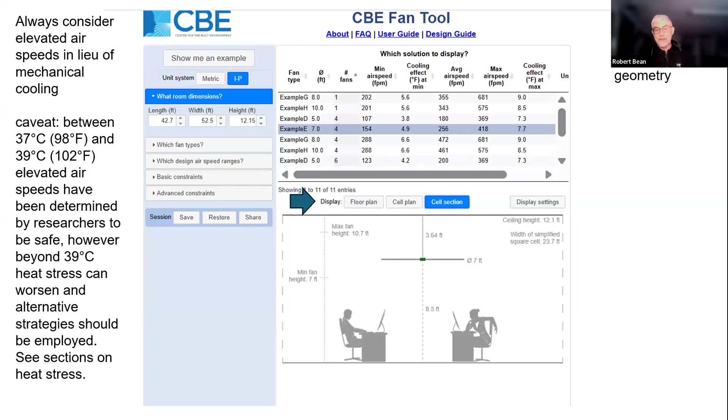So anyways, the tool—there's another part of the CBE, the Center for the Built Environment. They have this ceiling fan tool, and you can put in ceiling fans. You can model the number of fans, the type of the fans, and then you can see the cooling consequences or the perception of cooling that people have.

It'll tell you what the effect is. And you can see, if you take example number one, that table, you can see which solution to display. See example G on the very top row. Look at that cooling effect. People perceive the space to be 9 degrees cooler than it actually is because of the elevated airspeed. So it's a hugely powerful tool.

Why would you not use ceiling fans rather than going to more mechanical refrigeration, which we're already getting hammered on, talking about COPs and the type of refrigerant and the more equipment that's on net. There's a whole argument to be using ceiling fans over more mechanical refrigeration. Anyways, I love the tool.

When I was practicing, we used it all the time to try to convince clients. Some of the clients just told us to go pound sand. They hated ceiling fans, right? You're going to have those clients. They don't want to hear about window to wall ratios. They don't want to hear about performance. They don't want to see ceiling fans.

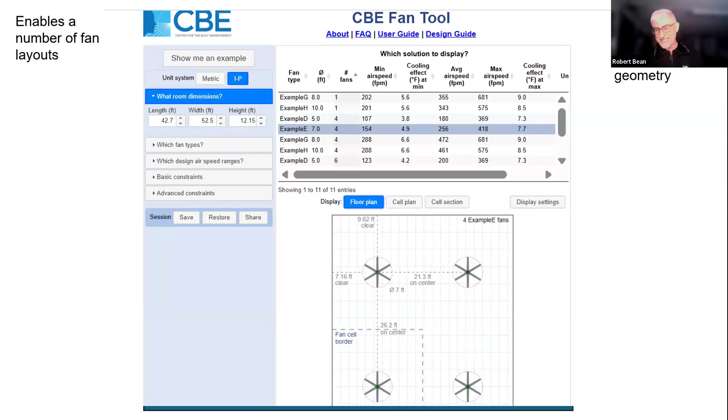So then it's you always got the challenge, Robert. It's always the challenge. And it's an easier conversation at the beginning than at the end. Totally, yeah. This is the challenge I have when I go in and say, well, you could do a ceiling fan. Are you kidding me? I just spent $1.5 million on this. Now you telling me again? Why didn't you tell me that before?

Yeah, exactly. So we also know we want to be careful with ceiling fans because there are some conditions where we call the operative temperature, which we talked about earlier in part one, it's the marriage of the mean radiant with the dry bulb. When that starts to get up, as does the humidity, ceiling fans can provide some relief, but at some point they won't provide any relief. And in fact, they can actually be harmful to the occupants. So we want to make sure that when we're using ceiling fans, that we're using it within appropriate conditions.

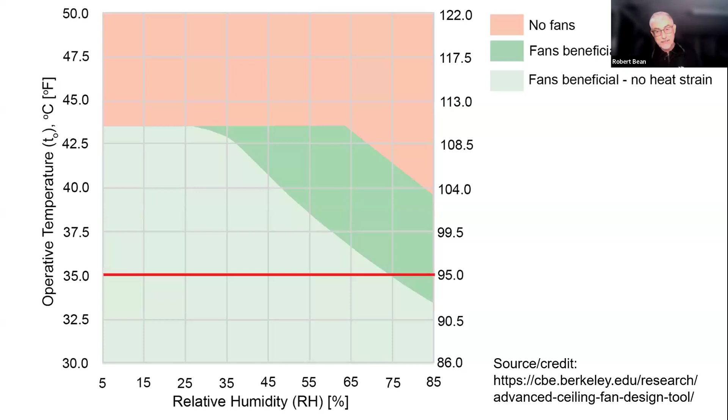You can get pretty aggressive to be able to use ceiling fans. But if somebody is elderly, for example, or they have maybe thyroid cancer or something that affects their thermal regulation in their body, you want to be really careful about that. That's why when we talked earlier about know your client, like who are you designing for, right? We don't want to make assumptions that could actually end up leading to problems. We want to make sure about that.

All right. Can we teach this to the housing industry? Absolutely. I got to tell you, so we're going to tell the story again, Gord. I'm going to tell this till the day I die. I'll probably tell it on my deathbed.

So Gord and his crew, Tracy and Alexis, Spring Camp, called up and said, okay, Robert, we want to do this workshop. We want to take all of our guests, 180 people, representatives from the building industry, architects, engineers, contractors, manufacturers, the whole gamut, and we want to expose them to this whole experience that you've been talking about for the last however many decades. And then I was thrilled about it. I got to tell you, Gord, I was a little nervous, a few anxious nights.

But I think, what did Tex tell you? He said, if you're going to do workshops, make them short, make them simple. And we did that. For everybody that's online listening, and Gord will attest to this, and same thing, the other folks with Building Knowledge are online, it was a huge success.

Getting people to sit down with a set of drawings, break up into teams, just like an integrated design team, and look at the building through a lens of somebody who's doing a thermal comfort assessment, and then trying to find those landmines and those rogue zones. And then, okay, well, yeah, there's going to be a problem. So how are we going to solve it? So yeah, absolutely, we can teach industry how to do it.

Here's the example that we used at Spring Camp. It was a multi-level building, all kinds of different geometries, cantilevered sections. We had large floor-to-ceiling heights in some of the rooms, like the great room, for example. It had all of the things that when I look at a building like this, back in the day when I was doing design, I would look at the property and go, well, okay, we've got a large great room here, tall ceilings, all glass. Right there, that's a rogue zone, right?

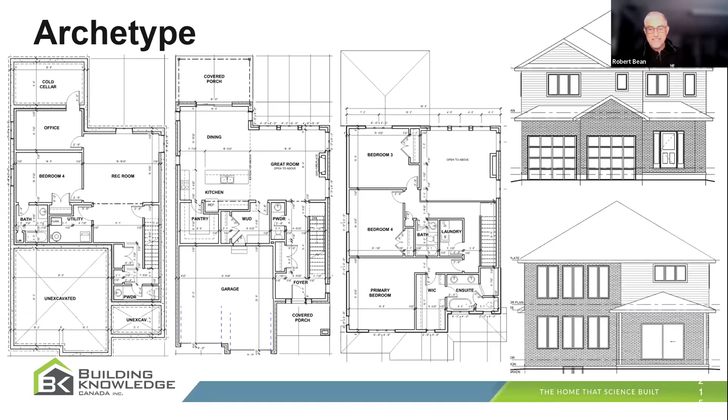So this was the building. And I'll add one other comment, which is that the basement in today's world is almost a de facto rogue zone. We didn't used to expect much out of basements, we wouldn't spend much time down there, it was in and out to do storage. Well now when we're using basements as lower living areas and putting in secondary suites, that's the quintessential rogue zone. It's cold surfaces, cold floors, no natural light, all those things. So almost all houses now in Canada, any new houses with the expectation of that lower living area, it too becomes a rogue zone. We're not necessarily going to talk about it today, but I want to remind folks of that.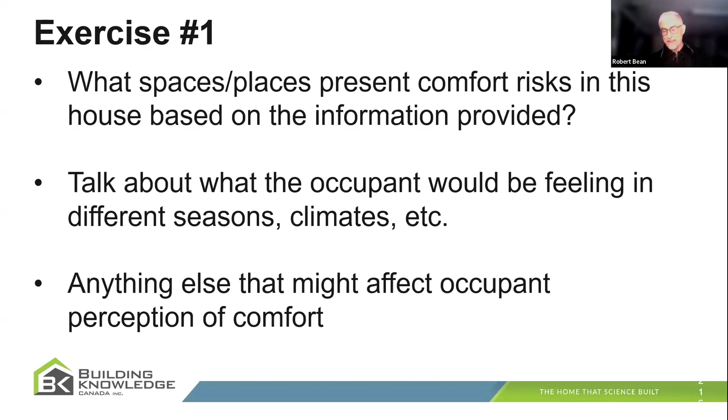Yeah, exactly. So Tracy and Alexis put this drawing out there and said, okay, here's what we want everybody to do. They broke everybody up into teams, became the integrated design team. And they said, let's look at these drawings and identify those rogue zones, and let's talk about how people would sense these environments they're in, what would their perception be, and anything else that might affect their comfort. Then the second thing was to come back later and say, what are the options we have available to solve these potential problems?

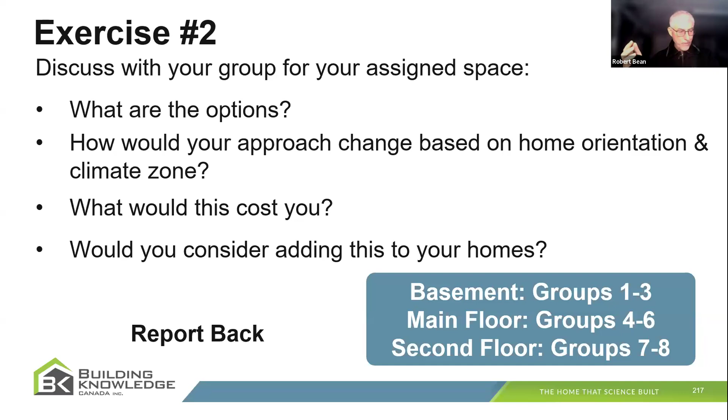It was one of the best exercises ever, because we had people thinking about the geometry, and we had people thinking about mechanical solutions and building science solutions, insulation, how can we reduce the bridging. And then also think in terms of cost, what are the consequences of these choices. We had a couple of builders in the room who said, you know, sometimes the cost of fixing the problem up front is way less money than trying to fix it on the back end. So when Doug Terry was in the room, and some other builders were there, they brought a wealth of knowledge to the dialogue. It was awesome, like I said, I'm buzzing about what happened there.

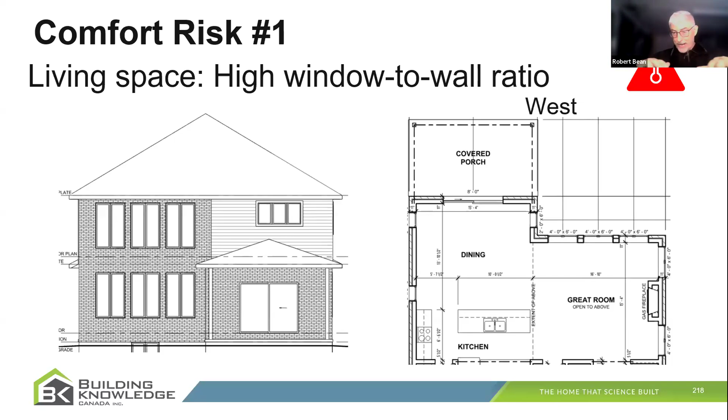So one of the risks, and I'm just going to show you some of the risks identified in the exercise, the living space was for sure a challenge. We had all of these massive windows, elevated ceilings relative to what was in the dining room, so you had this change in elevation. And of course, depending on how you oriented it, you can see here it was oriented west, but as you change how that's placed on the property, that's going to affect what's going on in the inside space.

We looked at the bedroom again, high exposure area to cold, we talked about that earlier on. But that's what your eye is looking for when you're looking at these drawings. You're saying, okay, how is this building situated on the property? Well, this is on the north side. And then let's think about the enclosure, and let's think about infiltration, and the window to wall ratio, and the performances.

When you start to realize you've got spaces where it'd be really difficult to condition, like the ensuite here, given that it's got an exposed floor because it's cantilevered, two exterior walls plus a roof and a small floor plate area, and people are going to be in there naked and wet. For those online, maybe from Egypt, you may not appreciate it, but it gets to minus 40 degrees C here. It's cold, and you don't want to create these environments. And then as Gord pointed out, the basement - so we started to look at how do we solve these problems, and Tracy and Alexis took us through some solutions.

One solution was looking at the high window to wall ratio. If we put in performance characteristic A, whatever that glass was, and we got non-compliance based on the tool we use, how can we bring that space back into compliance by changing the glass? So they messed around with the solar heat gain coefficient, dropped it down to 0.25, and all of a sudden we're starting to think about how people are going to experience it, and we can change their experience by changing the solar heat gain coefficient on the glazing systems. It's important to note the first one showed 19% of the population might experience discomfort. Now we're down to 6%.

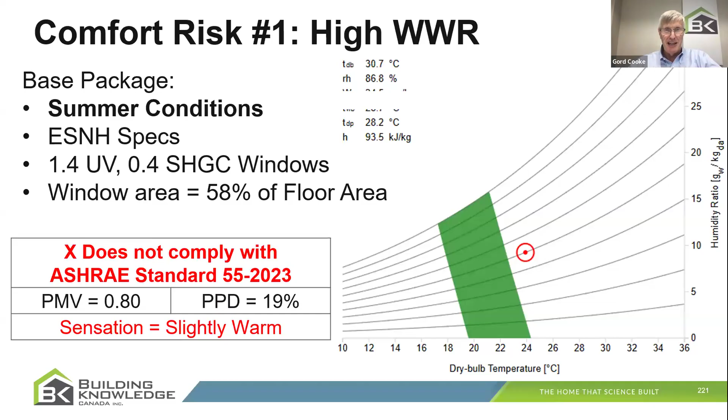Many of the builders on this call will say, well, I must always be building for the 6% because everybody always complains. So it's not perfect at 6%. It's a prediction tool, right? Keep that in mind.

I've had some success helping clients with that. This house was designed - we didn't know who was going to buy it. You've now purchased it. We designed it for less than 10% of the population. You fall outside that 10%. Let's get to work and see what we can do for you, because you have a sense of comfort that's different than what we had to design for.

I remember saying to a client, I've said it many times, picky people have to pay more, right? You're a particular person, you are quite sensitive to these things. My experience is we got to find a different solution for you because of your particulars. So sometimes that works, sometimes it doesn't matter, but I feel like I need to be honest and say you have particular needs - let's see if we can match your needs to a solution.

I hope everybody online appreciates that this whole exercise is about drawing people into the world of the client, getting to see it from their perspective, having empathy for how they will live in those spaces, and then appreciating that you're given an opportunity during the design stage to manipulate those building characteristics. When you start to see the relationship between people and the spaces we're designing, and then be able to create the proper conditions by manipulating those values - you know what, Gord, if that's all we ever achieved in these two parts, that's a win.

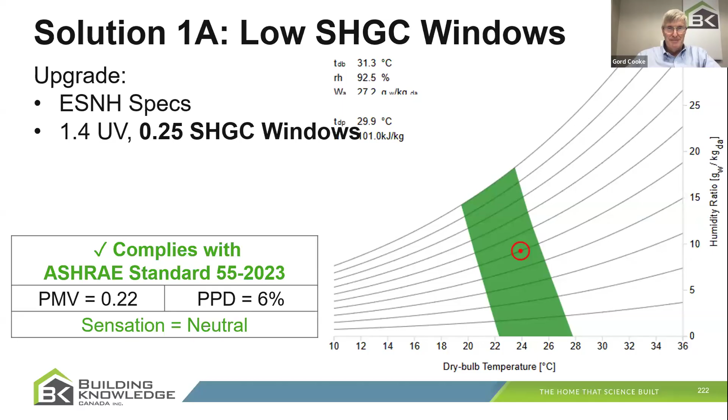I agree, right? So I agree. So my concluding thoughts on this, because we're getting towards the end, we want to make sure there's time for questions. I call it the romance of industry language, because the industry has used language that is very romantic.

But basically it's lies. One of them is people saying they can make a room comfortable. My first question to that is, how do you know? Have you ever asked a room if it's comfortable? And if it actually answered you, you might want to do an exorcism. Rooms have no feedback mechanism. And we know thermostats aren't it, because they're just sensing themselves. So we can't make rooms comfortable. There's no way for us to actually ask the room how it's doing.

How are you feeling today? Or would you like it warmer? Would you like it cooler? If somebody actually saw you having a conversation with your room, you're probably going to be in a hospital somewhere wearing a white coat, I'm just saying. So let's be careful of this romantic language that we like to think makes it simple - I can make your room comfortable. Yeah, unless you can figure out a way to get feedback from the room, I'd just say be cautious on that term.

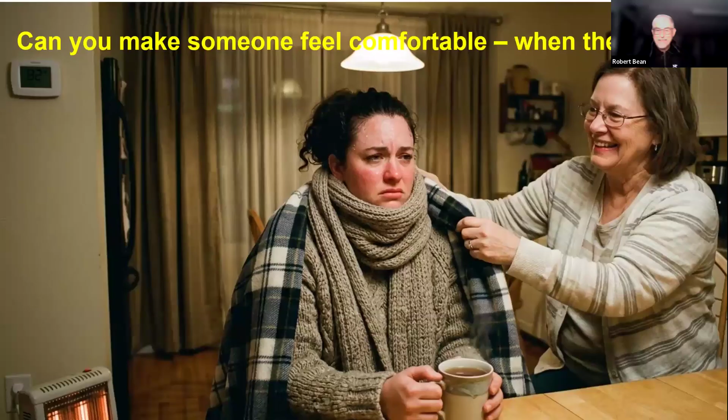The other one is making people comfortable. You can't make somebody feel something that they don't. And to me, in fact, if you could, it would actually be evil. Like, you feel this way - well, I'm going to make you feel something else.

We talked about this in the first part, where Andy Oding at summer camp asked the room, how many people are uncomfortable? I think, Gord, you said it was between 30 and 40%, right? So does that mean we made 60% of the people comfortable, but the other 40% we didn't?

So if you're going to make someone comfortable, that's a 100% requirement. Well, we know you can't make everybody happy. So making people comfortable, yeah, also sits on that's a romantic thing to think about, but we can't actually do it. Delivered comfort - we see this all the time. We're going to deliver comfort.

Like you're going to buy our particular heat pump or unit, whatever it is, and we're going to deliver it to you like it's a menu item. Well, can you return it if it doesn't deliver? I don't know. You can't deliver thermal comfort. It's a subjective feeling. People own the experience.

It doesn't come in a box. It doesn't come in a zippy device. It's their personal experience, and it exists up here based on what you've done around them. So let's be careful about using terms like making rooms comfortable, making people comfortable, and delivering comfort like you're a server at a restaurant.

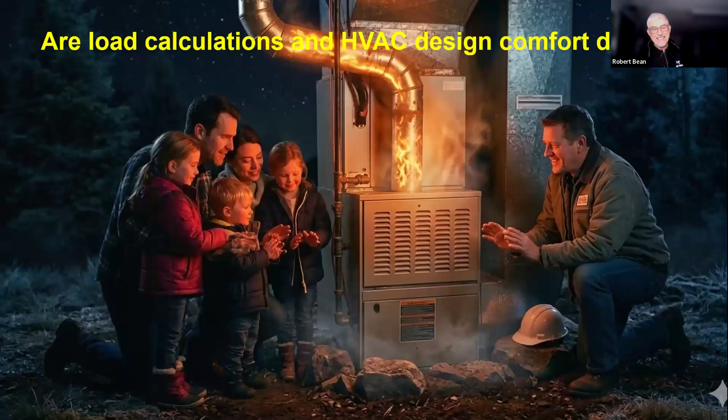And then the other thing is, we talked about this earlier in terms of load calculations and HVAC design being comfort design. It's really romantic to think that you're sitting in an office, Gord, doing load calculations, sizing ducts, picking heat pumps. If you're on the hydronic side, picking boilers, going floor heat, and everybody's going to be huddled around what you're designing and load calcs, and everybody's going to be happy.

That's a Hallmark card moment, right? Just isn't going to happen, right? This process is for compliance with the building code, and the thermostat serves as a witness that you've actually done your job, but it's not a requirement in thermal comfort. We have other things to worry about in thermal comfort.

And that goes back to this concept, because here in Canada, for those that are from Egypt or India or the UK, wherever, we have a requirement here: thou shalt maintain 22 degrees C in all living spaces at design conditions. And we know that there's lots of places where 22 degrees C is on the wall, but everybody in the room is either too hot, too cold, too muggy, whatever the complaint is. So be careful of that.

So at the end of the day, Gord, for everybody online - and you actually mentioned it in the first slide - what we can do as an industry is use this combination of factors. That means we have to pull everybody in: the architect, the enclosure design person, the interior people, the HVAC people. And we can create these thermal conditions, which would reduce the probability that people will have this perception of discomfort.

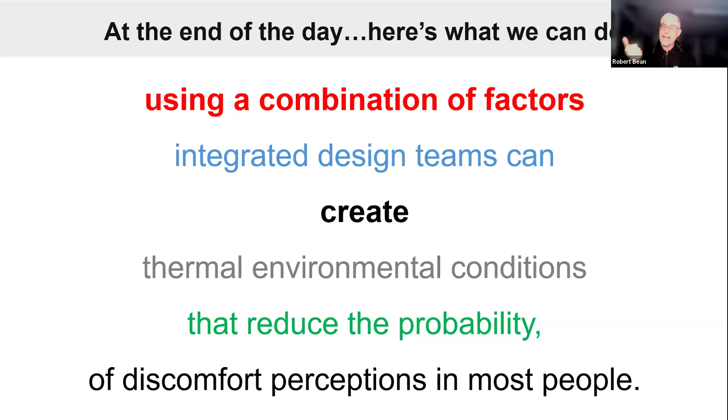That's all we can do at the end of the day. And the more we understand our client by asking them who are we designing for, and the more we know about architecture and enclosures and interior systems, and when we match the problem with the right mechanical system, then we've done our job. We've reduced the probability that people are going to complain, and that's all you can do. Can't make them comfortable, can't make the room comfortable.

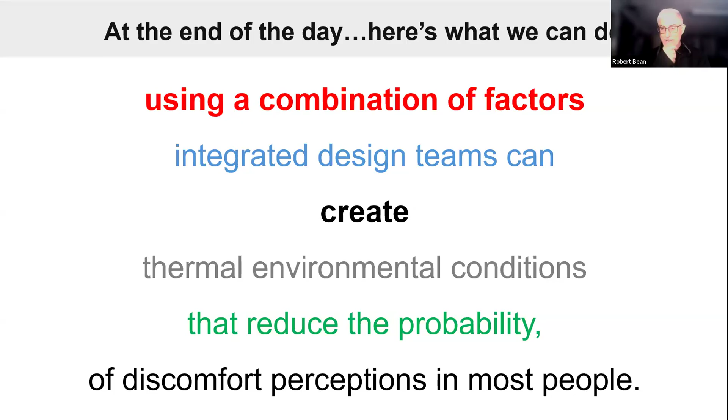Load calculations is not design. 22 degrees is not a proxy for thermal comfort. All we can do is create the conditions. That's it, Gord. That's wonderful.

And we do have some questions, and we're a bit in the rapid round, but I will take a stab at some of these questions. There's two that are very similar: thermal comfort is subjective, but there's metabolic rates that are different.

People have different needs. How do we satisfy that? Angela asked, who do we use as the surrogate, if you will, as the proxy? You might say, well, the elderly, the sick, maybe you would give them priority, or you would give them adaptability. In my case, my three sons each had different comfort needs. It took me 10 years to basically figure that out, to say you should be like the others, and then realize, no, that's not going to happen.

We spent another 5 years fiddling with the central mechanical system to see if I could figure that out. The last 2 years of his high school career, I put in a ceiling fan. What it meant is that one of the sons had control over his sense of comfort, and just the fact that he had control made all the difference. It was in his room and in the family room, and in the cottage they fought a little bit over who got control of the fan. But that's what you do, is you start thinking about those kinds of things.

Morteza asks, what's the best practical way to find the mean radiant temperature? Can you use a thermal camera? What about new construction design? We know we did the calculations. You can do it knowing the thermal characteristics of the wall, knowing what's happening outside. You can do a mean radiant calculation.